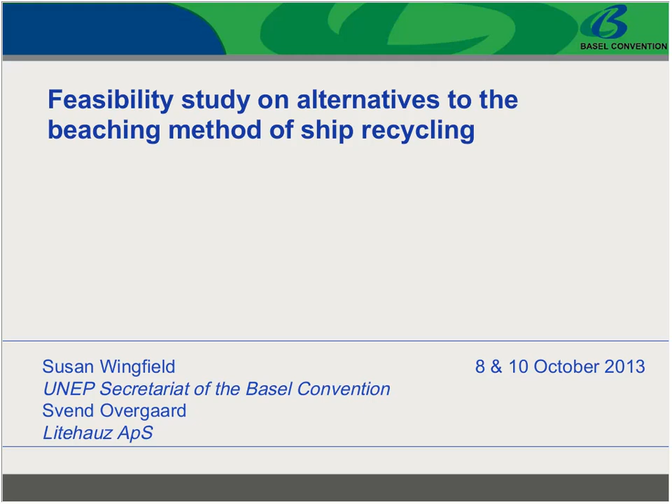So, as Dan has said, I'll start off with a brief introduction to the feasibility study, just the background, the reasons why the Basel Secretariat commissioned this work. I won't take much of your time because Sven Overgaard, our consultant from Litehauz, has a very interesting presentation to follow.

So to give some background to the study, the Basel Secretariat, way back in 2007, established the Global Program for Sustainable Ship Recycling. This was really to bring concerned stakeholders together to ensure coordinated action with regard to improving standards in global ship recycling.

As I'm sure you're aware, there are many different organizations that participate or contribute to this industry and who are also working on rules and regulations with regard to the industry. Essentially, this global program was an attempt to bring all of those stakeholders together. And we have been successful on a number of occasions bringing organizations such as the International Maritime Organization and the International Labour Organization together to ensure combined action.

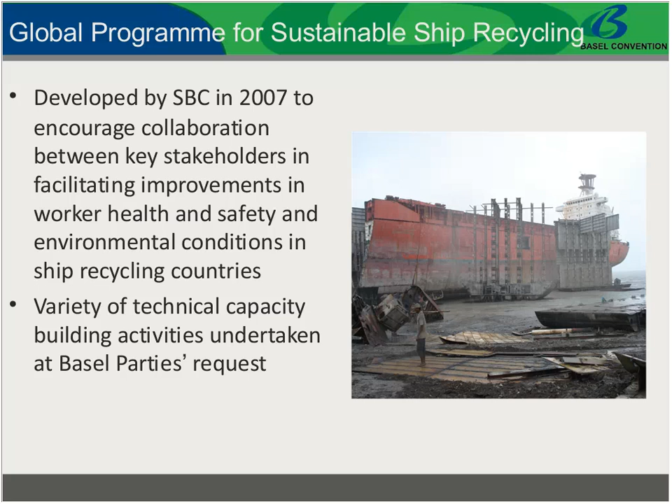Now, the second study, the feasibility study, which we're here to talk about today, really is the second part of the grant from the European Commission. This is to look further into the future. The Basel Secretariat's tried to take quite a pragmatic approach with regard to ship recycling and to its capacity building work, but recognizes that really we would like to encourage a move away from the beaching method in the medium to longer term. Therefore, this feasibility study looks at alternatives to the beaching method of ship recycling.

And the main requirements of the consultant to undertake this work was to look at what are the alternatives. Really, the main alternatives we're aware of are pier breaking and slipway breaking. Of course, dry docking is also an option. So what are these alternatives? Where could these alternative types of operations be established, and what would be the cost?

I should mention that it's not only to establish new facilities. As you can imagine, this would require quite a lot of capital investment to begin with, but also looking at already existing facilities who would need to upgrade to compliance under the conventions. But when I say already existing facilities, I'm really referring to pier and slipway facilities.

We tendered for this contract last year, and the contract was awarded to Litehauz, which is an environmental consultancy working mainly in the maritime sector. So without further ado, I'd like to pass over to my colleague Sven Overgaard, who will provide you the results of the study. Thank you.

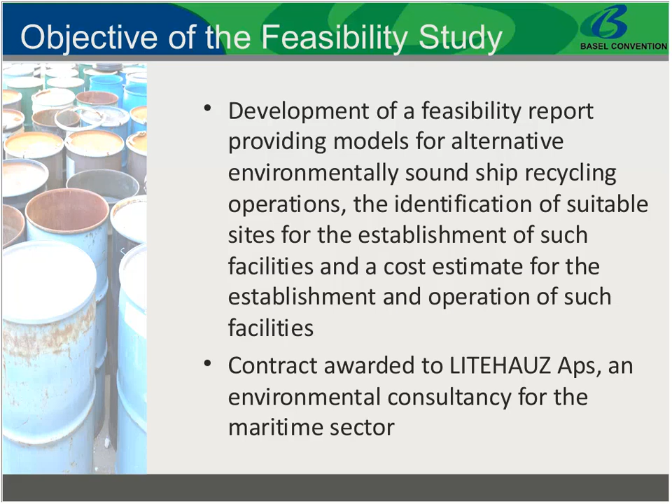My name is Sven Overgaard, and I'm from Litehauz, as mentioned. And I will just briefly introduce our company. Apart from ship recycling, we also work with ballast water issues and air emissions and environmental issues in the Arctic and waste and oil rigs.

Some of our selected references for ship recycling: we led the World Bank study in 2010 on the shipbreaking industry in Bangladesh and Pakistan. We also recently did a study for the Dutch and German development banks, the FMO and DEG, on global best practices and applicability in ship recycling in Bangladesh.

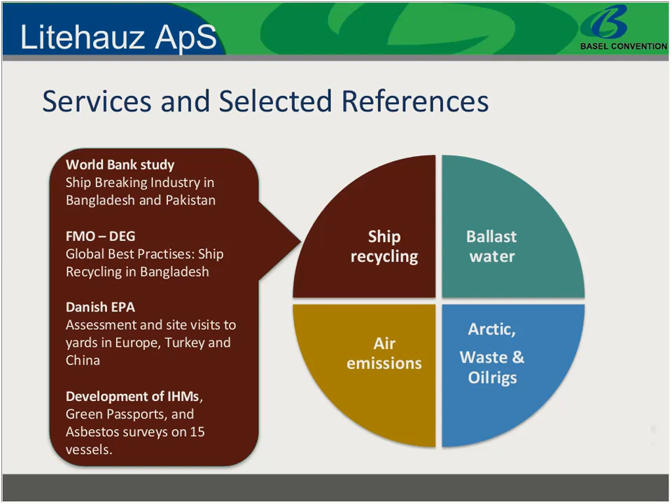We've also done a project for the Danish Environmental Protection Agency, where we assessed yards in Europe, Turkey, and China, and of course a number of IHMs and green passports. I reckon that most of you know about the ship recycling methods, but I'll just briefly introduce the concept of ship recycling before I go into the results from the feasibility study.

And basically, we have 4 methods of ship recycling. We have pier breaking, which is a top-down dismantling process. This is mainly done in China and Western countries. We have the landing, the slipway, which is where the ship is sailed onto a hard landing. And it's also a top-down dismantling process. This is the method we see applied in Turkey.

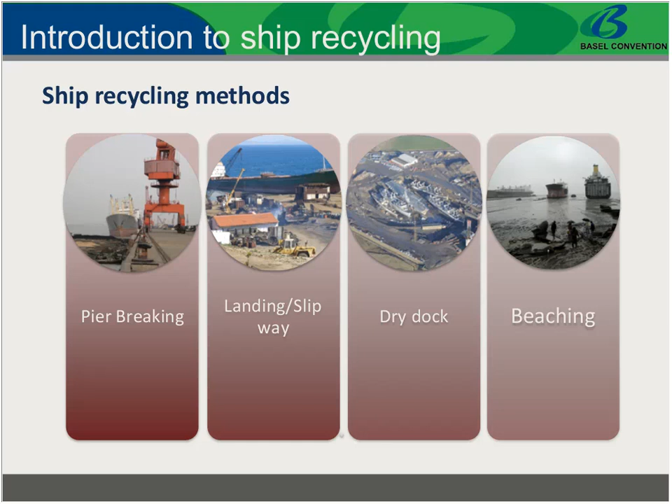As Susan mentioned, we have the dry dock, which basically is you sail it into a dry dock, you close the ports, and you have a totally confined area with minimal risk to the environment. And of course, the beaching, which is applied in India and Bangladesh and Pakistan. The ship is sailed onto a shore, and they use the tide to sail it onto the shore, and then you dismantle it from the stern to the bow.

The top 5 recycling nations constitute 98% of the world total in 2011, and these comprise India, China, Bangladesh, Pakistan, and Turkey. So that's the main beaching nations, and China has pier breaking and Turkey has landing.

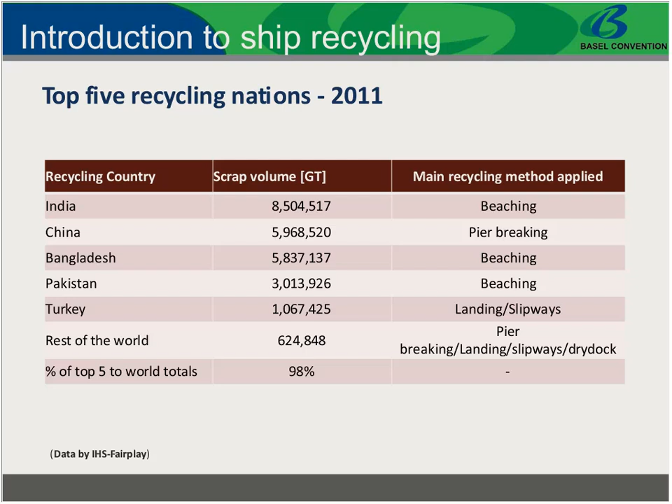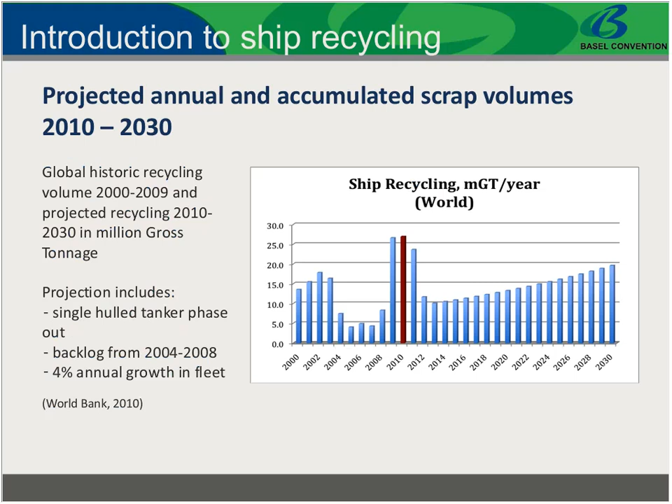I just included this. I know this is old data, but just to give you an idea that the scrap volumes in the future will continue to rise, and we foresee that it's somewhere between 10 million and 20 million gross tonnage per year. I'll just skip further here.

The main reason is obviously there are key impacts associated with the current methods of ship recycling. And we see occupational health and safety issues, worker fatalities, injuries, a lot of health issues related to exposure to hazardous materials. And we also see environmental degradation of the surroundings, contamination by hazardous materials.

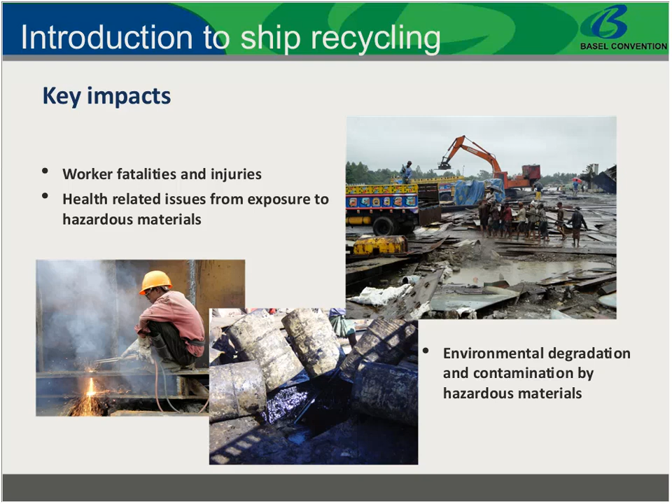And a favorite of mine is the picture on the right, where you see about 10, 15 workers walking barefoot with a large plate of steel. And in the background, you can see the lifting machine with a magnet that does exactly the same work. And these two are obviously not very fond of each other.

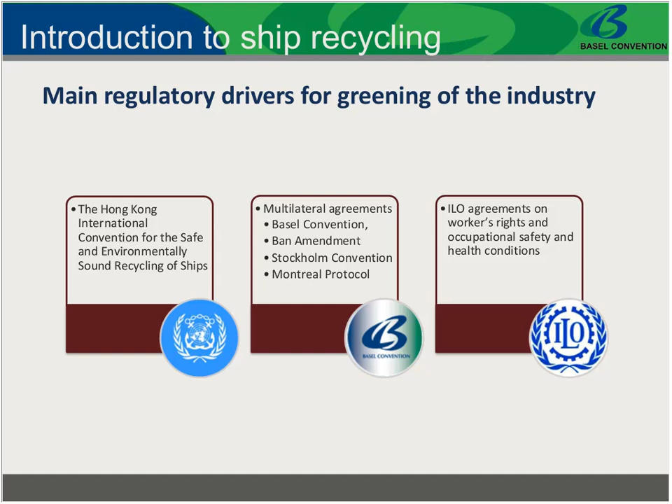Some of the main regulatory drivers for greening of the industry is, as mentioned, the Hong Kong International Convention for the Safe and Environmentally Sound Recycling of Ships. We also have a host of multilateral agreements. These comprise specifically the Basel Convention and the Ban Amendment, but also the Stockholm Convention and the Montreal Protocol, to mention a few. And of course also a host of ILO agreements on workers' rights and occupational safety and health conditions.

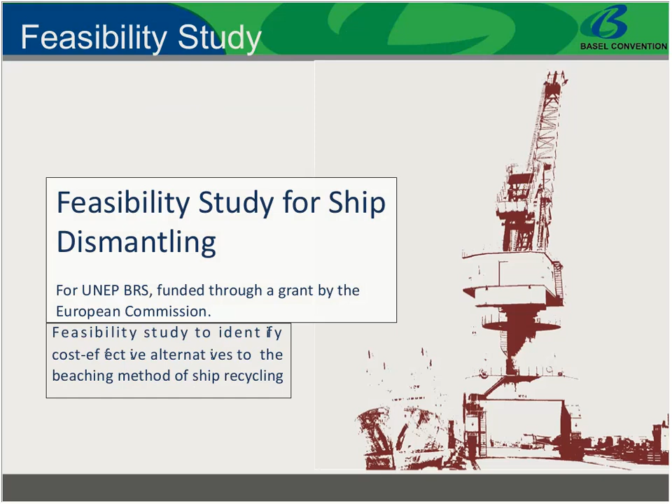Well, to get to the crux of the matter here, the feasibility study was to identify cost-effective alternatives to the beaching method of ship recycling. And we looked at two scenarios: the upgrade of existing facilities and establishment of new facilities. And the study approach was, I can see the picture here is stretched in a funny way.

I can see that the study approach was basically that first we identified the components of environmentally sound management. What does a model facility need to have to be environmentally sound? Secondly, we assessed the current applied methodologies on pier breaking and slipway, and established a baseline of how many components they actually apply at this point in time, and what were the upgrade requirements to reach the level of the environmentally sound model facility.

Then we estimated the cost of the upgrade and did a sensitivity analysis on the key investments. We also looked into how that would look in a time scale, in an incremental implementation schedule for different components, and tried to identify the feasible locations for model facilities. During the course of this study, we also had consultation with stakeholders and did a field trip to China to visit the environmentally sound shipbreaking yards.

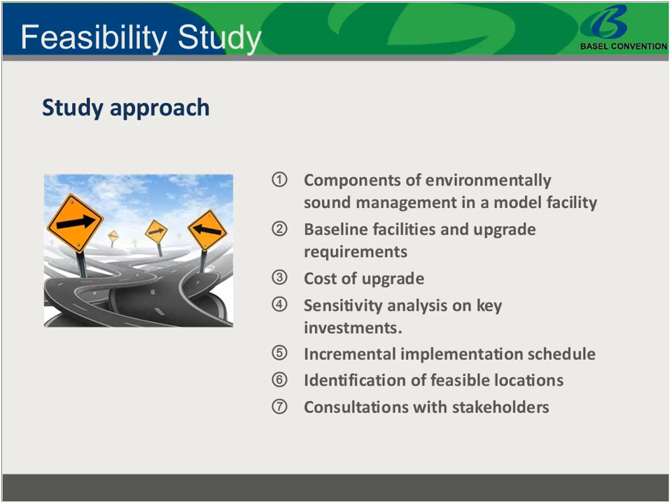So, for the components of environmentally sound management, we basically used the Hong Kong Convention technical guidelines, also called the Facility Guideline, and the Basel Convention's technical guideline, and divided the components into four key areas. These are the pre-cutting phase, where documentation and identification of hazardous materials are. There's a cutting phase, with all the equipment for the dismantling activities, and yard facilities, and lastly, quality assurance and procedures.

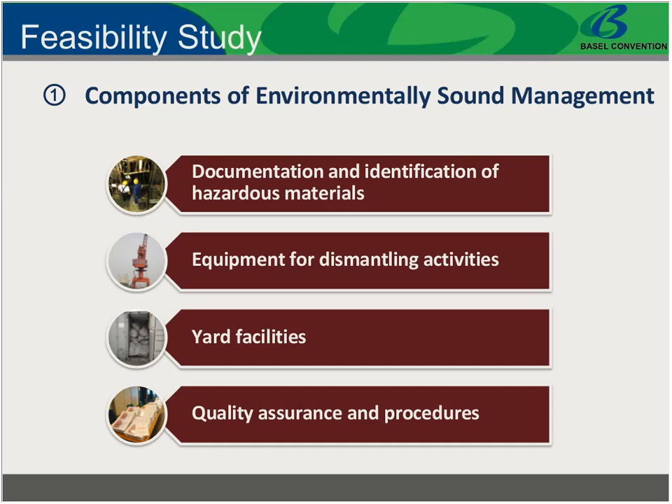For the first area, the documentation and identification of hazardous materials, this basically comprises the identification of hazardous materials on board the ship. If there is not an inventory of hazardous materials, it could be what are the procedures to identify the hazardous materials. It's labeling, it's the creation of the inventory. The cutting phase for the equipment and dismantling activities is all the equipment that is needed to ensure proper handling of hazardous materials, and equipment to secure the workers working on dismantling. It's all the heavy machinery and light machinery to actually do the dismantling.

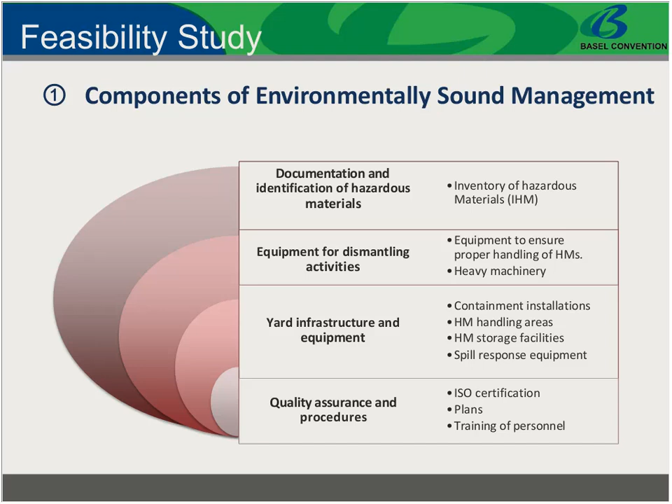The yard infrastructure and equipment comprise, for instance, containment installations. It's the impermeable flooring for the hazardous materials handling areas. It's storage facilities. It's spill response equipment and so forth. For the quality assurance and procedures, we looked at the cost of ISO certification plans, and that could be the ship facility management plan, it could be the specific ship recycling plan, and it comprises also the training of personnel and training schedules and so forth.

Based on all the identified components which were cost efficient, we developed a model facility, and the model facility basically is comprised of all the components with differentiating levels, differentiating number of components. And then we assessed the level of the currently applied equipment and procedures and available infrastructure that was already applied in the pier breaking and slipway facilities around the world. We did that to be able to assess the upgrading to reach the level of a model facility.

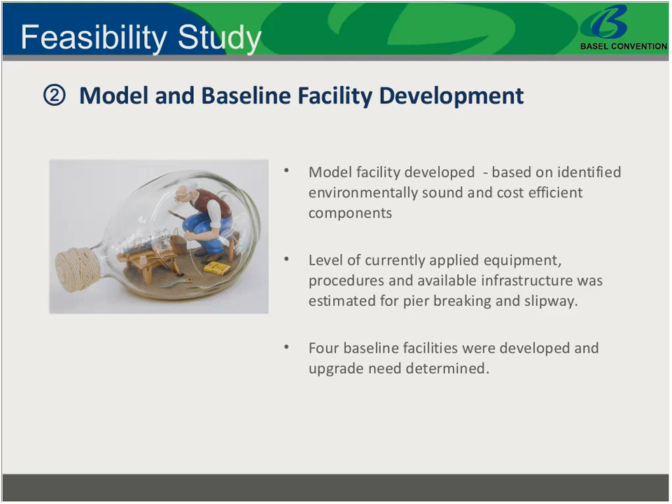Sven, can you hear me? Sven? Yes. Sven, can you hear me? You're experiencing a sound issue. Your voice on that last slide has been cutting quite often, and we haven't understood the text you've read out. Sure. What's the sound like now? Now it's okay, but sometimes the sound is just cutting. There are some empty spaces between your words, but while you're speaking, the system is cutting down. Is it the system that shut down, or is it my microphone, do you think? Now you're speaking, I can hear you perfectly. Okay. But maybe speak a bit slower, and if it comes back, I'll let you know. Okay. Yes, please. How far back should I go? Just this slide. Just one slide? Yeah, just the beginning of this slide. Okay. Thank you. You're welcome. I'm sorry. I hope you've heard all the key information here.

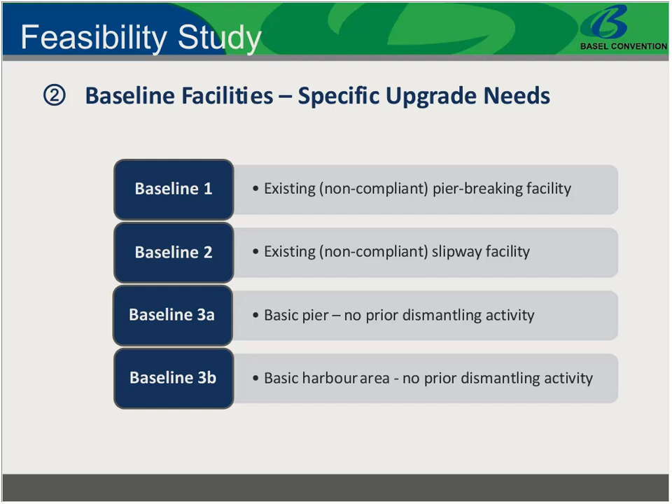So of course there's some assumptions associated with these baseline facilities, and in general we assume that all the logistical infrastructure was available, basic installations, electricity, water, etc. Got access roads to the yard area. There's crucial waste treatment facilities and disposal facilities in form of, for instance, landfills.

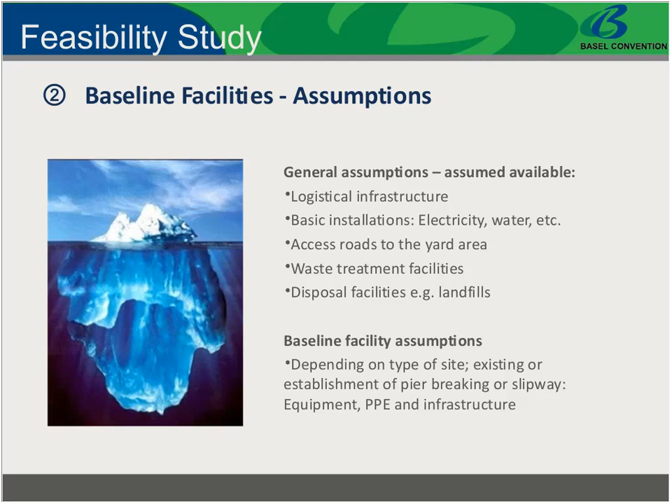There are also a host of specific facility assumptions, but these are depending on what site or type of site we're looking at. Is it an existing pier breaking facility that has certain assumptions associated with it, or a slipway, or if it's establishment from scratch for pier breaking or slipway. And these assumptions are associated with equipment, personal protection equipment, infrastructure, etc., at the level of applied equipment.

The requirement is to minimize contamination of the environment. The unit is drums, and the upgrade demand is 10 drums. And then there's a price associated with it. We did that for all the components, for all the scenarios.

I can add here that we did not only use the 4 baseline facilities. We did that for 3 sizes of facilities, and that was 25, 50, and 100,000 LDT scrapping volume capacity. And the last 100,000 scrapping volume capacity was done in order for a facility to be able to do 2 ships at the same time.

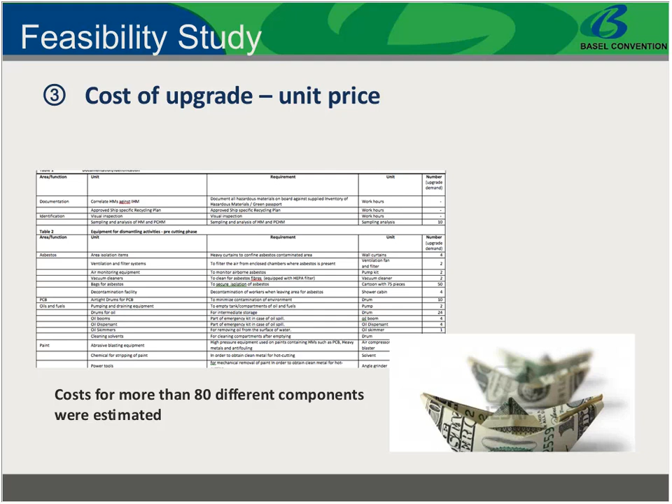And there's a jump up to the existing slipways to 21 million, which is not that different from establishing a facility from scratch. This is mainly due to the need for floating piers and barges for cranes on the existing slipways in order to be able to do 2 vessels at a time.

The relation between the sizes of the facilities are proportional, so we basically did the different sizes in order for the facilities to recognize themselves if they have a small facility, a medium, or a large.

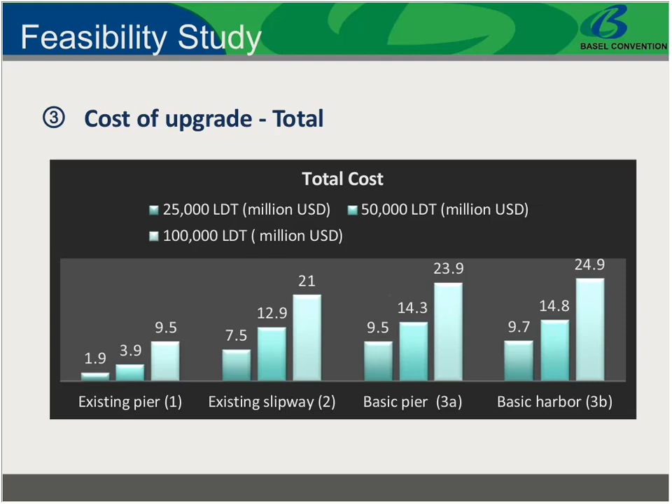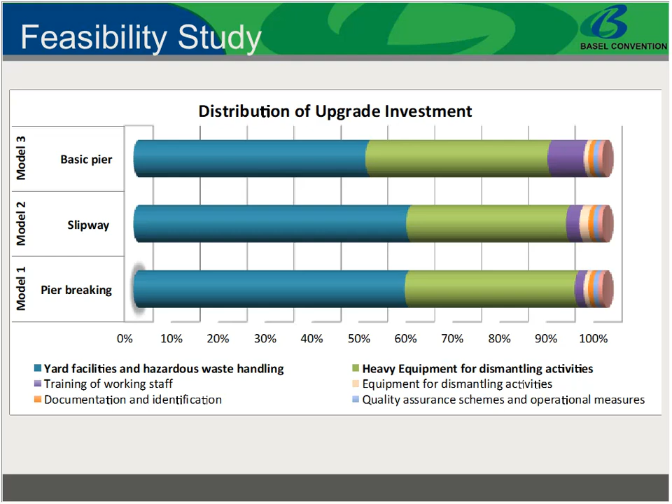We also looked into how that can be implemented on a time horizon, and we used the time schedule, the incremental implementation schedule that Roy Watkinson presented in the case study. That is basically a short term, up to 1 year for all the minimal equipment, medium term, 1 to 3 years for simple and low cost techniques, and long term, 3 to 7 years for improved infrastructure and heavy machinery.

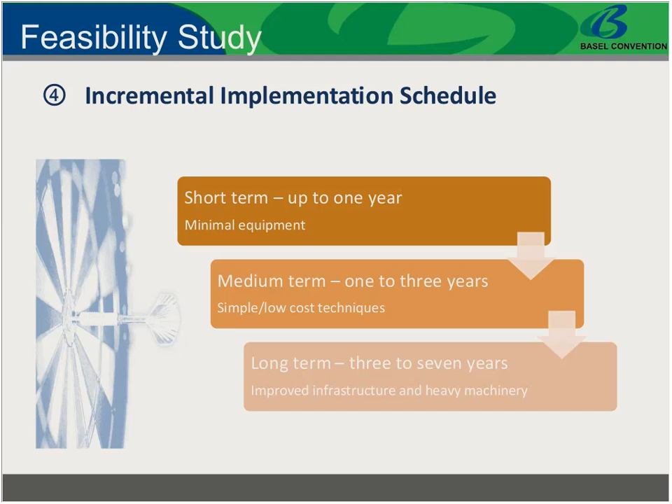It's the other way around for the basic pier and harbour, but that is basically because it's establishment of a new facility, and there's no prior operation, and a lot of basic equipment are needed in order just to begin the operation.

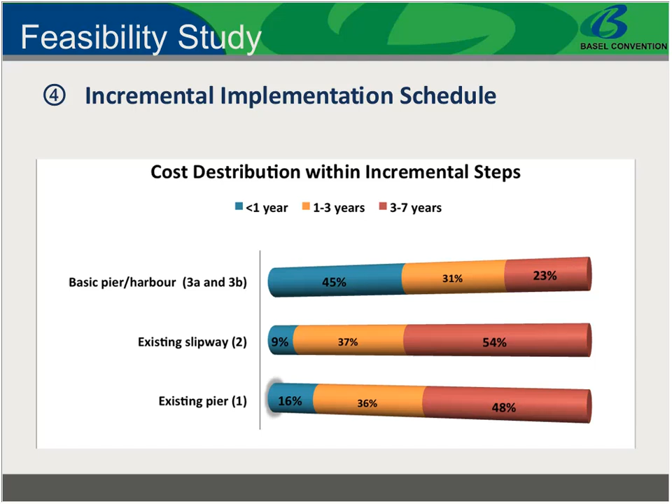We also, for the concrete, in the basis calculations, we use mean prices based on Turkish and Asian prices, and for the sensitivity we used a low and high price as boundaries. And the concrete is basically for the impermeable flooring. It's for construction of office and storage buildings.

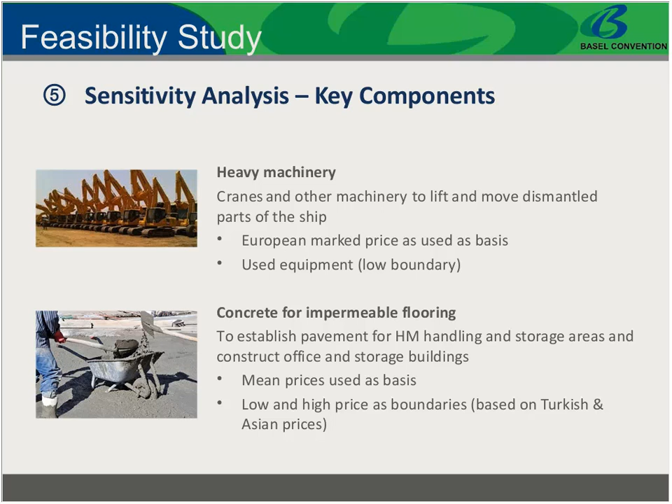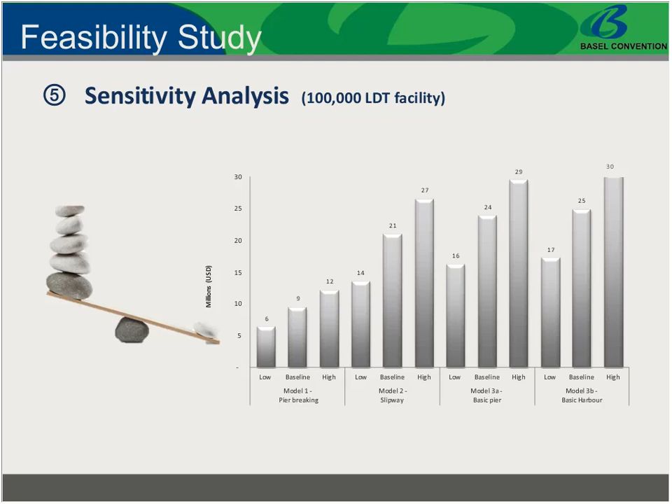I have a machine going on here. I hope that it's not annoying and you can hear what I'm saying. It's a little bit frustrating for me. Yeah, sorry. I hope it doesn't affect the sound. No, it doesn't. Please go ahead. Okay, thank you.

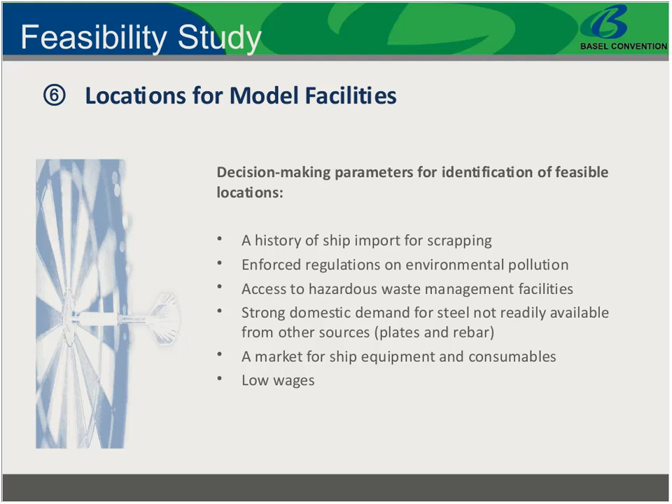Part of the study was also to locate feasible locations for model facility upgrades. And part of the scope was that the countries or the locations should have a history of ship import, scrapping. And what we found was that some of the key parameters was that it should have an enforced regulation on environmental pollution, there should be access to hazardous waste management facilities, and very importantly, there should be a strong domestic demand for steel not readily available from other sources, and low wages, and there should also be a market for ship equipment and consumables.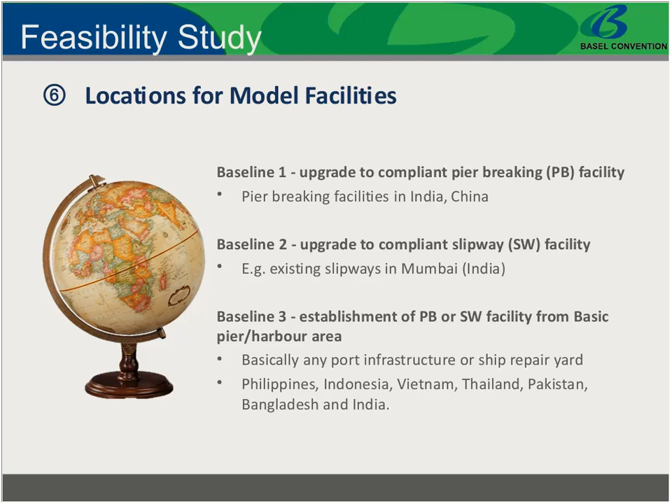During the course of the study, we also did consultations with stakeholders, and we asked the ship owners why choose green recycling. And basically, for them, it was compliance with their own environmental policy and a way to minimize the risk of negative publicity. An interesting aspect was that they didn't find the added costs of environmentally sound recycling as a key barrier.

Some of the key challenges that they experienced was that they find it difficult to actually identify a qualified recycling yard. They also found it difficult to ascertain the consistency between what was actually promised by the recycling yard and the actual work that was undertaken. They also found it challenging when they use subcontractors in form of green cash buyers, just to make sure that the transparency was there, that they could actually monitor the whole process and so forth.

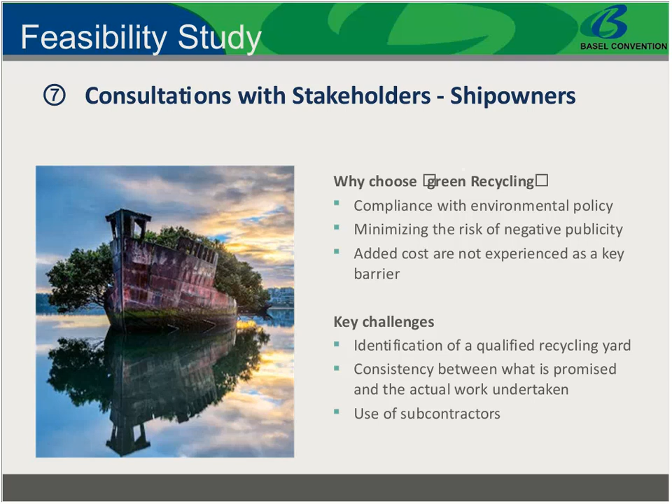Part of the study was also to do a field mission. We went to China with Susan and representatives from the local Basel Convention office. And background for China is that beaching is not allowed, and they primarily use pier breaking as a shipbreaking method. It's an area which is regulated and enforced, and because beaching is not allowed, it's one of the most developed with regards to environmentally sound recycling outside Western countries.

We went to Changjiang Ship Breaking Yard, which has had several upgrade projects conducted at the yard, and they now apply key environmentally sound methods. They have procedures in place. They have largely the training and capacity building programs in place, and they wish in the future to come into consideration for the EU list of compliant facilities.

And during the course of our visit, they explained that in order to do so, they would probably need to upgrade certain things. One was some of their training and capacity building courses they needed to upgrade. They needed to upgrade some of their heavy machinery and impermeable floorings for hazardous material segregation.

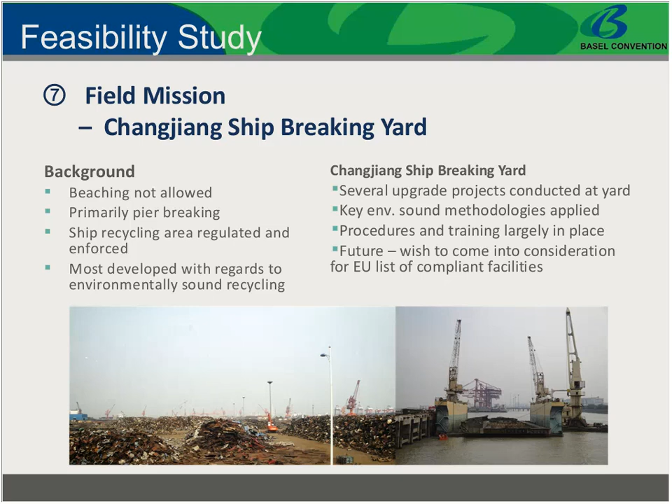And I can see now that my time is pretty much up, and I think I'll just wrap it up here. Thank you for listening to this presentation, and we can go into questions and answers.